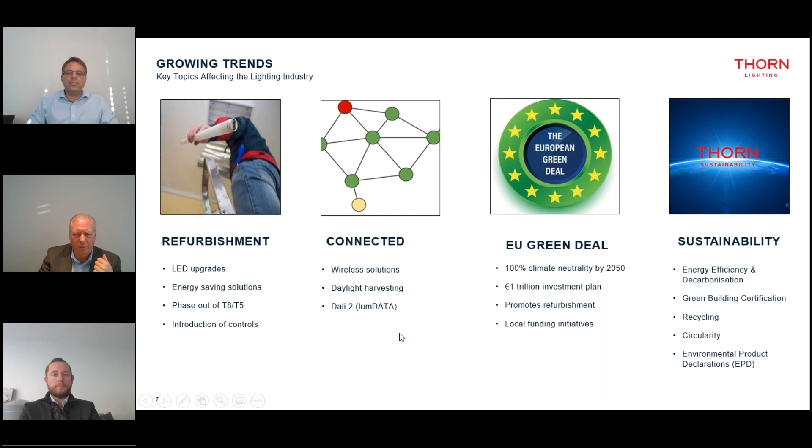And the other area for Thorn really is sustainability: energy efficiency, green building certification, and recycling are all big areas that we're very much focused on. And this is driving the lighting industry at the moment. When we look at the background to it, the European Union have set this net zero carbon by 2050, which is quite a target. Prior to that, they're looking by 2030 to reduce CO2 emissions by 55%.

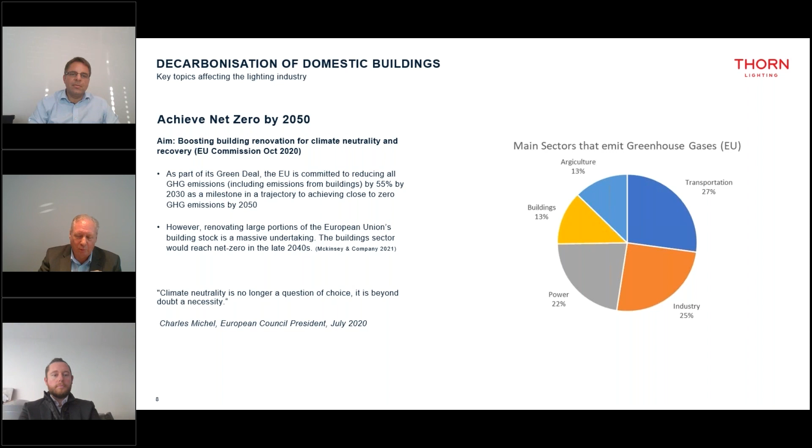And we have a quote from McKinsey saying this is actually quite a big task in Europe, and they think it won't be achieved until the late 2040s. And the European Council President in 2020 says this is a necessity. We can't ignore this anymore. To save the planet, we have to take this seriously. And as a lighting manufacturer, this is something we very much want to get involved in.

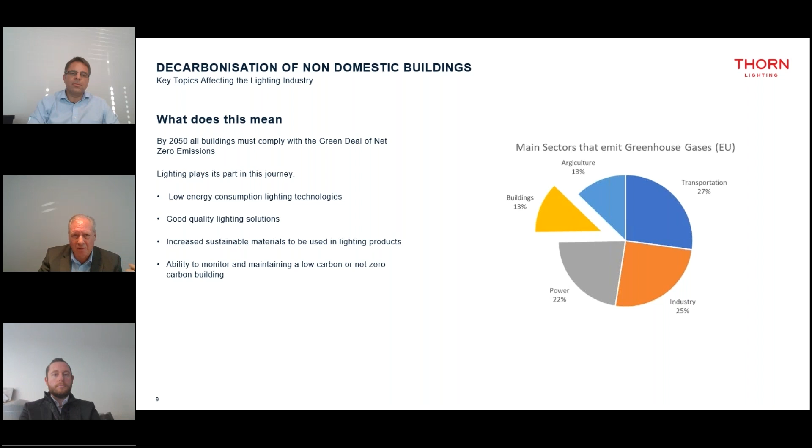13% of the emissions of CO2 come from buildings, and we think lighting will play an important part in this. We now have low energy consumption, good quality lighting, and we've got the tools now to help achieve that target set by the EU. But there's another driver for lighting, and this is one that really affects car parking, especially indoor car parking. And this is the phase out of T8 and T5 fluorescents.

By August next year, within Europe, T8 and T5 will be completely phased out. And I think this will drive demand in other countries too. You can see that fluorescent came in 1934, and there are millions and millions of fluorescent solutions out there. So there's quite a lot to do.

And we know from the data that we collect that even within Europe, 58% of the installed base is still not LED. So not even half the market is LED. So we know that there is still a lot of work to do to get towards this target of reducing our energy consumption.

So where does Thorn come into this? Thorn have been a manufacturer for well over 90 years. We are based in the UK. We do both indoor and outdoor lighting, and we focus very much on car parking because from our offer, we can solve problems for the outdoor part of the car park, the indoor part, but also the building surrounds and the roadways.

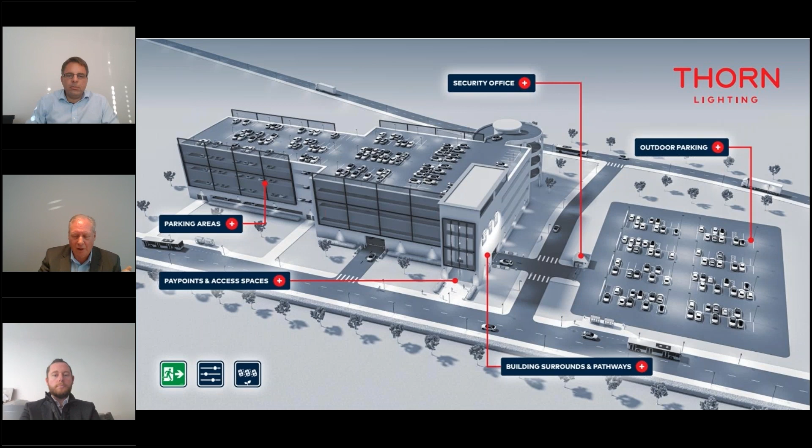So we have a focus on what we do best. And looking at car parks, Thorn are very much a champion of good lighting, and that's really what we want to do. Car parks need to be safe and secure for the people that use the car parking. We want them to feel safe because they can be busy spaces. And with the obstructions of just moving cars and pedestrians, good lighting helps avoid any accidents that happen here. But also we like to follow the regulation, and we normally follow the norms of the EN.

So looking at the areas of car parking where we really focus our lighting solutions, we look at the outdoor area, and we have the solution for the outdoor, and Eliot will speak deeply on this nearer to the end of the presentation, where we want to make people feel safe in those areas and avoid dark spots. And in the indoor segment, we don't want to walk into a dark cave. We want to light them so that people recognize faces, recognize the pathway.

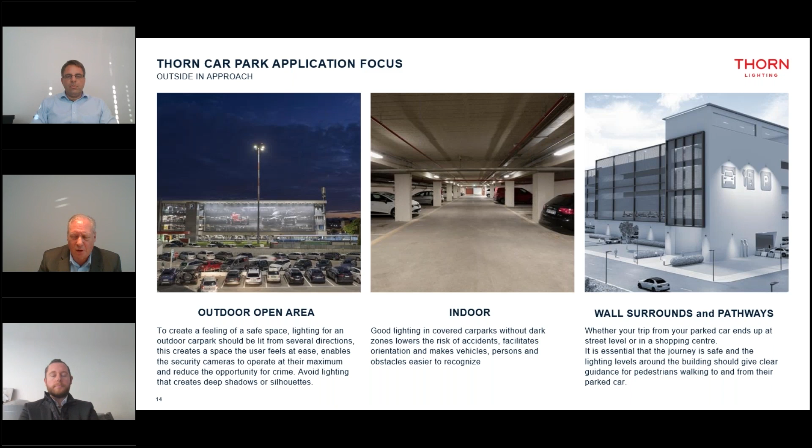But also the surrounding of the building. You walk from the car park to your retail park or to another area. And again, we need to ensure that people feel safe. And the lighting regulation means that we're not polluting light going upwards. So we spend a lot of our energy making sure light points downwards and we don't get reflected upward light. But again, Eliot will talk about this in his part of the presentation.

So looking at indoor lighting, here we're looking at the multi-story car parks, the underground car parks, in retail spaces, in airports, and in transportation areas. And all of them have basically these four elements: the entrance and the exit, where there could be a change from dark to light and light to dark. So lighting this space needs to minimize any glare to the driver. This area is probably exposed to the elements. So again, we need to ensure the lighting always works. And they're probably operating 24/7.

Going into the parking area itself, we need to avoid the possibility of people driving into each other or driving over things. The good lighting, again, is quite important, and we need to make sure it's safe. And we use a choice of optics to get this. And also, we consider lighting controls in this area. And then looking at the other areas, the pay station is an area where people are probably quite agitated. They have a lot of people around them. They're trying to pay for their parking. So this area needs to be well lit, mainly from a security point of view.

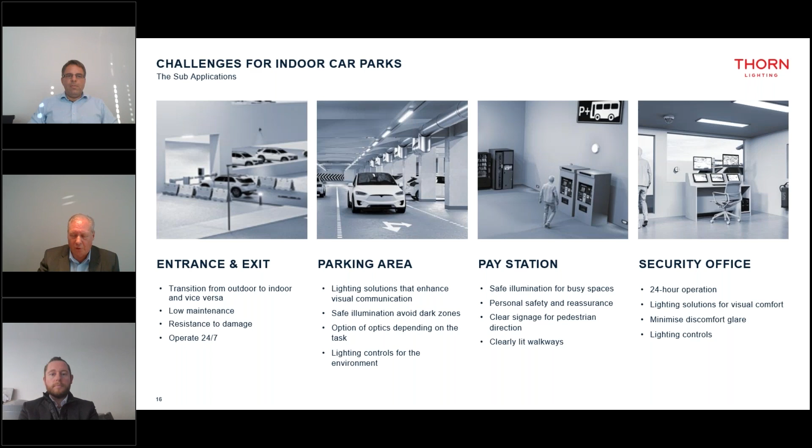And then there's the people that work in the car parking. We need to consider them. They're spending long hours in the office. So we need to ensure the lighting in that area avoids glare off the screens, and it's a comfortable place for them to work in for long periods. And this is something that we try to do with our solutions.

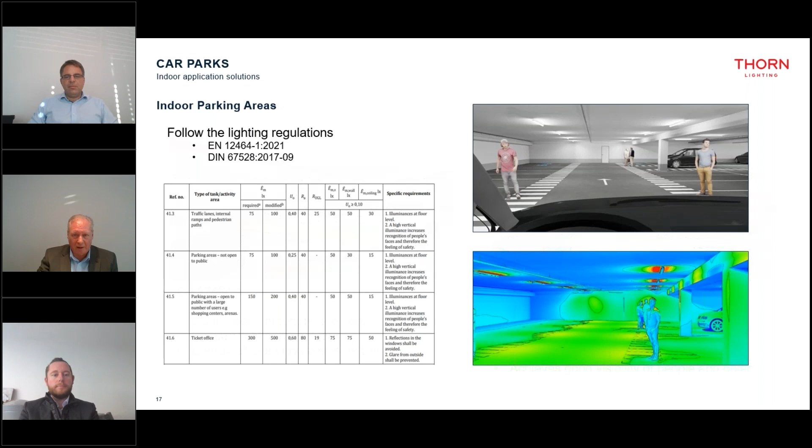So as part of lighting, we always try and follow the regulations. And when we're doing lighting design, we follow two regulations, which is the EN 12464, but also the DIN regulation, which is very much for the German-speaking segment. Both these regulations are acceptable and very good. And I can show you the difference between the two in the parking standards. One of them, the EN standard, measures the floor, that there's good light on the floor that allows you to drive within the space and also walk the space.

And the DIN specification is slightly different. They look at the level of lighting 1.2 above the horizontal, and also they measure 3 levels on the vertical, so 0.8, 1.2, and 1.6. And this achieves good visibility of people. So you can see the face, you can see the features of people as you're driving around, and it makes the whole area a very safe space. And this is something that we can offer as part of our service.

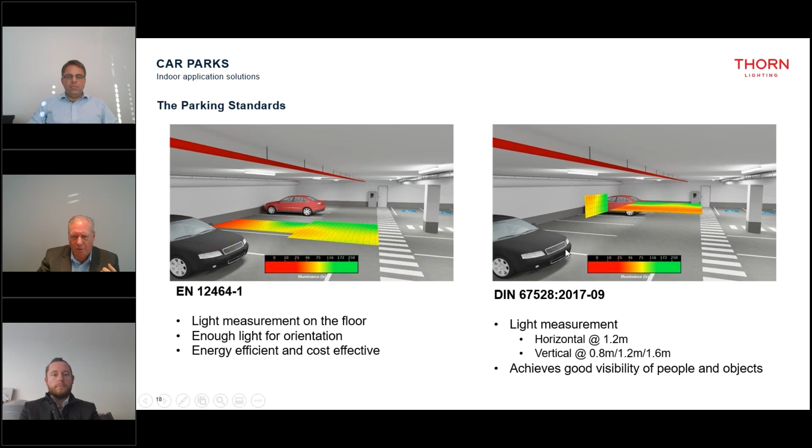So looking at the car park area, what can we do? We offer a number of products. And these products are specified for the car park, because we know that normally in a car park area, the ceilings are quite low. So we need to use a wide beam optic. Traditionally, the AquaForce Pro is what we would use with this wide beam.

It's IP65, it's IK08, so it's tough and resistant, and it allows for the dusty environment that could occur within the car park. But it has this very wide optic, and by having the wide optic, it means we can light all the spaces within the car park itself and avoid this dark cave atmosphere.

But we also have other products. We have Force LED, which is very highly resistant. It's made of aluminium, so if there are areas where we need exposure to the elements, then we can use Force LED. So we have the options of products that we use, and we can pick depending on the application area.

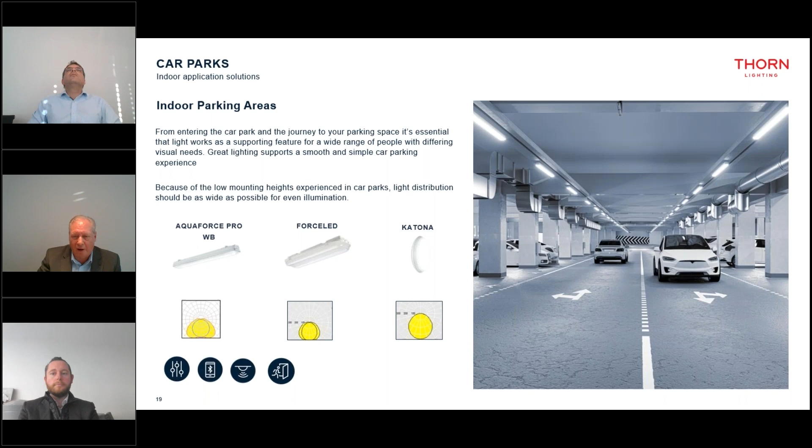And then we have another product called Katona, which is intended for stairwells. It has a 2000 lumen output. It's IP65 and IK10, so very tough. And it fits very well in this environment where you need tough, robust products.

Some of the trends we're seeing indoor are going to be very much new technologies. We see that now there are security cameras very much. There are cameras that will identify your number plate to visualize you coming in and leaving, but also the growing demand for electric chargers, the EV points.

The estimate is by 2030, there'll be something like 17 to 18 million electric cars across the world, and a large proportion of them will be within Europe. So this additional energy consumption is quite important in the construction and development of car parking. From a lighting point of view, this is where we think we come in very well, because our aim is to reduce energy within the car park environment. And we see that in the future, the management of energy within the car park environment will be an important factor.

So what we want to do is help you save energy, and what tools can we give you and offer you to do that, especially in the refurbishment market. The options we always see are LED tubes, gear replacement for the products that are already there, or a one-to-one new replacement of a product. And for all of them, there are things you need to consider.

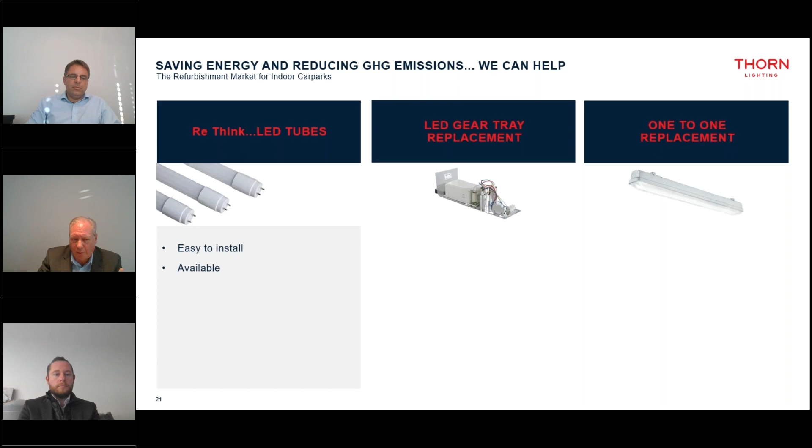LED tubes, they're very easy to install, they're available, but putting them into an existing product really causes some negatives. For example, light distribution. The light distribution of fluorescent is completely different to an LED tube. So do we achieve what we set up in our lighting design, and do we create shadows by putting in the LED tubes? There is no lighting control, so we can't dim the products.

And also, if you put this type of product into an IP65 or 66 fitting, then is there going to be a thermal issue? And does it then cause failure of the product because it overheats? So there are some pros and cons, but from Thorn our feeling is that there are more negatives than positives.

The other thing is just to replace the gear tray that's already installed. That's very easy to install. They're available. We already offer this as a service from Thorn. It fits into the current luminaire, and also it doesn't destroy the architecture of the ceiling that's already there. It may be that you've got a historic building and you can't really take out the old fitting and then put in the new fitting.

But here there are some negatives because, again, the distribution between the fluorescent tube and an LED can be slightly different. And the other issue we have to consider is the fitting itself. For example, an IP65 waterproof fitting may have been in a building for 10 years. At this time, there may be UV issues, and the plastic may start to become brittle. And if you change this for a gear tray, then you might actually break the original fitting.

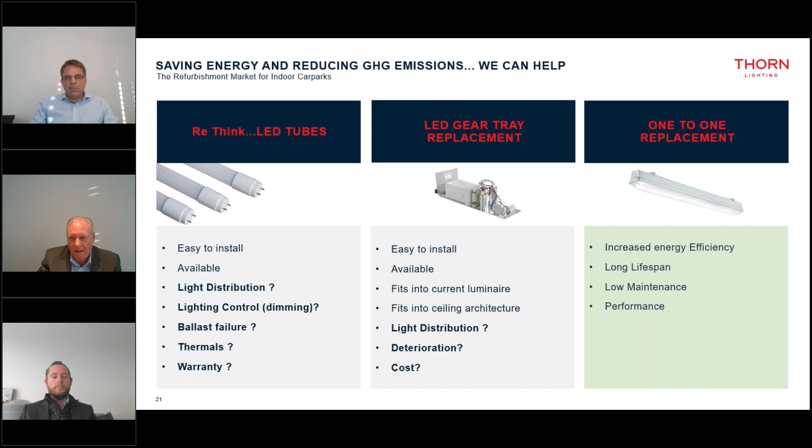And lighting controls: we can now introduce lighting controls, which we'll talk about later. And then it meets the needs of the user of the space. The one-to-one is actually designed to go in that location.

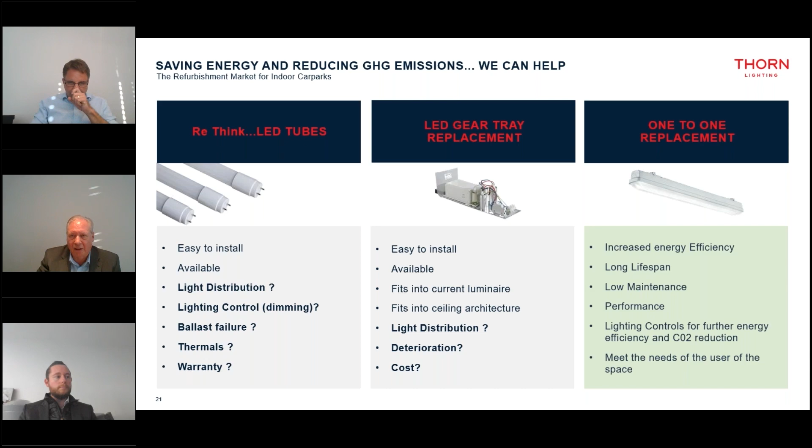So I've got a case study just to try and explain what I mean and how we see this as something we need to do in the future. This is a car park from Holland, and it was an existing car park that we refurbished. It had 125 fluorescent tubes in it, and they needed to be replaced with LED. The car park itself was operating 24/7, and the estimate was a 12-year lifetime before they wanted to do any replacement. And it's just a very simple refurbishment option.

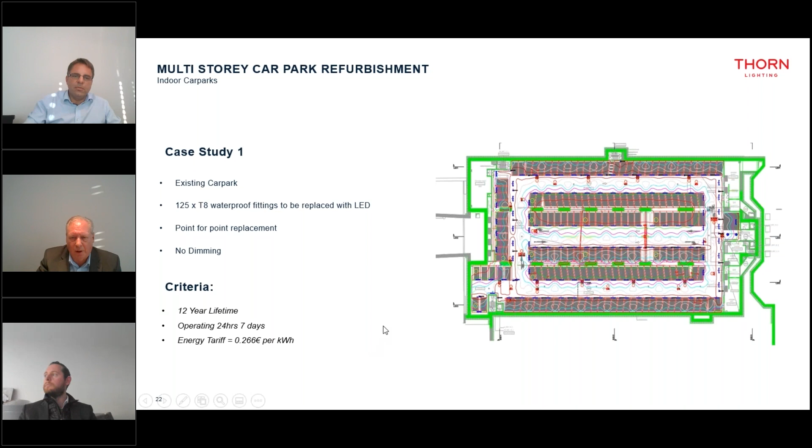And when we put this into the calculation and the solution, the payback period was under 15 months. The amount of energy that we saved was 55%, so a big reduction in energy. And also on CO2, we saved over 38,000 kilograms of CO2 over the 12-year period. And the solution complied with the new parking norms. So it did what we aimed it to do, which is light the area correctly, but also save energy. And this is something that we really are trying to bring across, that with these targets of energy efficiency and sustainability, even just changing to LED gives you a good option.

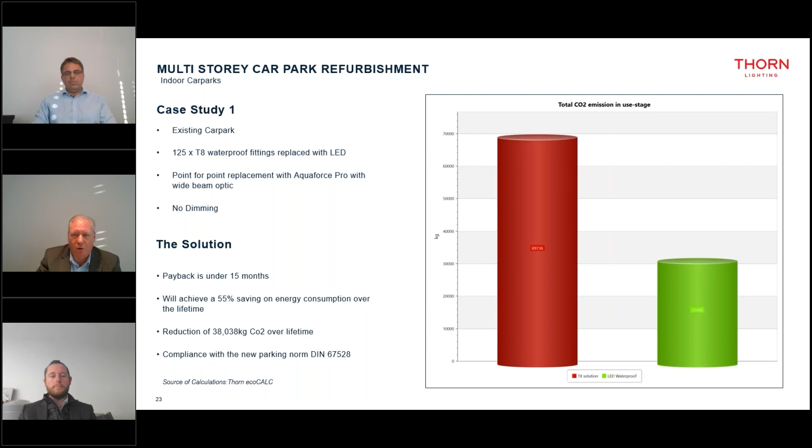But what else can we do? What other options do we have? One thing we can look at is a control solution, a wireless control solution. We can still look at reducing energy consumption and our carbon emissions even more. LED is great, but a lighting control solution could be even better. And if we have a wireless lighting control system, then we can minimize our refurbishment time. So the cost, there's no additional cables.

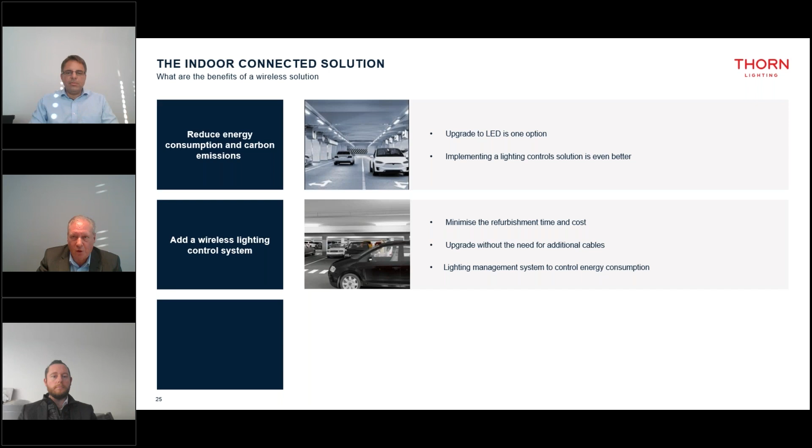And then we have a lighting management system that can control our energy consumption. And we still maintain safety in the car park. We still achieve a good lighting solution, and we also meet the lighting standards that we set out to achieve. Plus, we are going to reduce energy consumption and reduce our carbon footprint. So we're working towards this zero target of 2050. One of the solutions we have is called Basic Dim. And I'm going to ask Jens to explain that, because he's very technical, and then you can understand why this is really a nice solution for car parks.

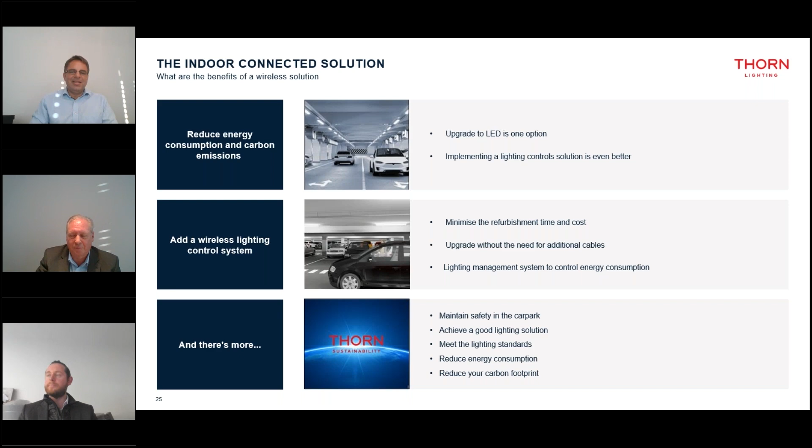Okay. Yeah, thank you very much. Let me introduce Basic Dim Wireless to you. That's a wireless solution, as the name says. The system is called Basic Dim Wireless, and all the luminaires connected with it have a big benefit, because you don't need any DALI wiring anymore. The normal way is to have bus communication; DALI stands for Digital Addressable Lighting Interface. But wireless is a perfect way for refurbishment.

So this system is going to be commissioned with a mobile app, on a handheld or a tablet, for example. There's software on it, and then you can do the commissioning. And the benefit is quite good, because you can reduce the power consumption and, of course, as Alan already explained, the carbon emissions.

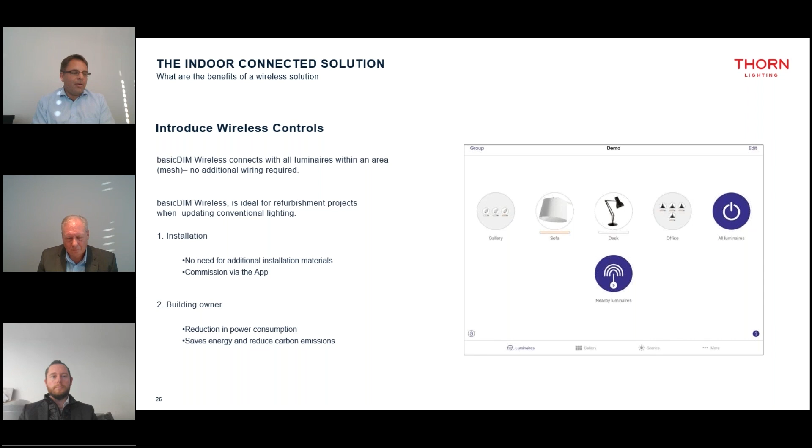Basic Dim Wireless provides a mesh network. So what does mesh mean? Mesh means all nodes are connected to each other, so the information runs through different paths. Every node has a connection to its neighbor, and this has a lot of benefits. It's a very stable network, so there's no single point of failure. That means when one node breaks down or has a fault, the network is still stable and still working. The commands will always find a way to the next luminaires.

And further on, the functionality is distributed over all nodes. That means on every node there's software containing all the functionality, so presence management, daylight management, and all the stuff. If one node fails, the whole mesh network is still up and running, and this is a big benefit against a single point of failure. Okay.

Of course, this system also has a certain limitation. You can have up to 250 nodes in one network. Of course, you can then have more than one network in a facility. This is possible, so it's really scalable in terms of size.

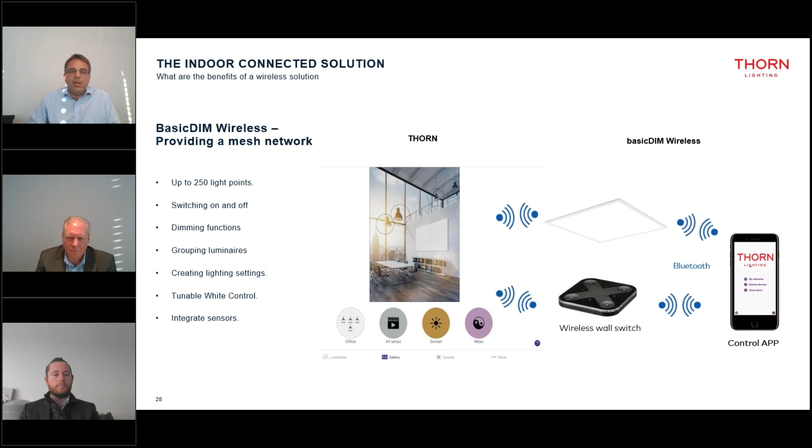As you see here in an example, every luminaire is equipped with such a wireless node, and some of the luminaires also have a sensor integrated. It's a microwave, a radar sensor, and this is a very good kit for a one-to-one replacement. So you can deinstall the old luminaire, install the new wireless luminaire in the same position, and then, for example, you can group them. And the big benefit, again, is that no additional cables have to be installed, so no additional effort and costs for DALI wiring.

With this grouping functionality, you can also define different light levels for different areas. For example, you have risk areas like where the payment machines are. There you want a higher light level, set up when presence is detected, so the light never dims down to zero. But maybe there are other zones where a lower light level is absolutely acceptable. The setup is all done with the commissioning app.

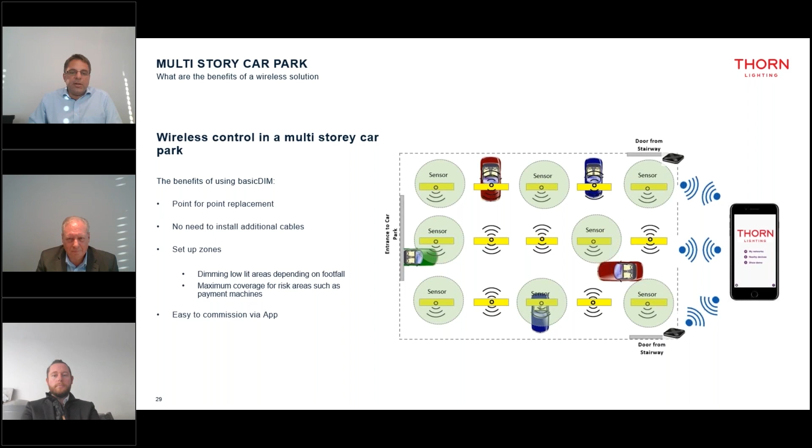So you set up the wireless network in the facility, maybe in one floor of the parking, and then this gateway can control up to 64 luminaires, standard luminaires as well as emergency luminaires, single battery powered emergency luminaires, and brings this information to the central DALI controller. And of course this is scalable for different levels. If you have a multi-story parking facility, then you have maybe 1 or 2 gateways per level, and you can set up a really high professional lighting management system on a wireless way in your parking facility.

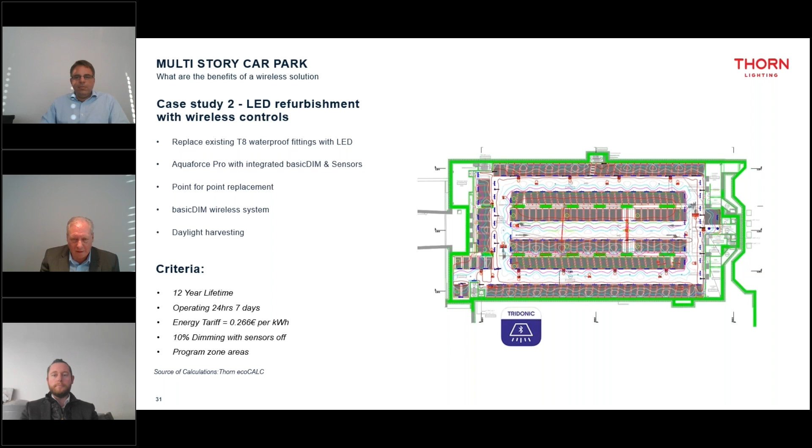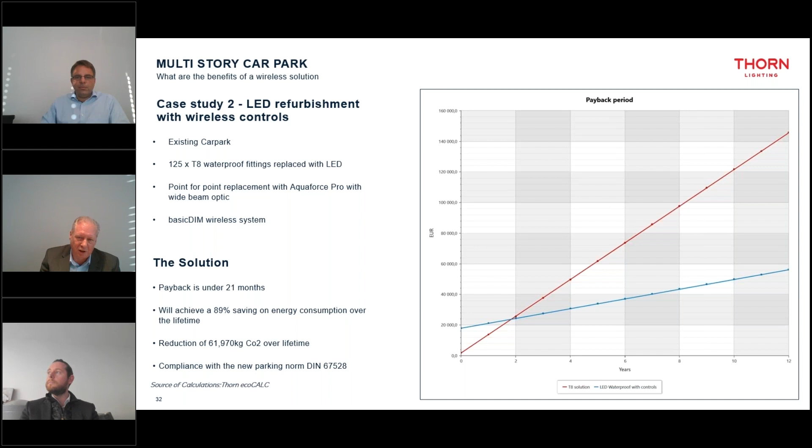So when we put that into calculation, the payback period is longer than the standard - it's 21 months because of the additional cost and additional commissioning. But the big advantage comes in the energy saving. Versus fluorescent T8, nearly 90% of our energy is saved. And looking at carbon reduction, nearly 62,000 kilograms of CO2 is reduced over this 12-year period. So it's really quite important.

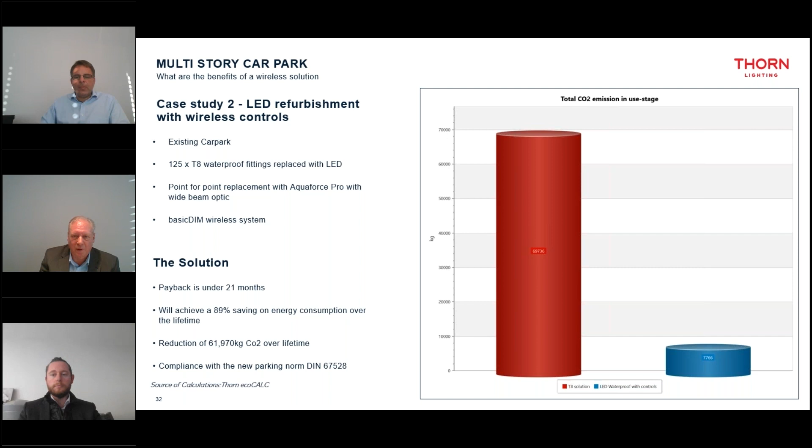What's more interesting is when we start to use controls and we're dimming and controlling the lights, our lifetime starts to go up. The calculation is based on 100,000 hours, but by controlling the light and reducing the amount of energy, we can look at 15 years lifetime for this sort of solution. And we make a comparison between fluorescent, either T8, and the cost over lifetime energy consumption versus LED.

So with LED, just the total cost of the lifetime, we can see a 39% reduction. But in energy costs and CO2, we get 55%. When we step up and we look at dimming or controls, we can see an even bigger reduction. So we can see that the cost of a lifetime is 61%, and our energy reduction is 90%. And that's a significant amount just by controlling the light to be on the right time in the right place.

And from my point of view, implementing an LED luminaire and lighting controls into a car park refurbishment will not only reduce energy bills, but also contribute to significantly reducing greenhouse gases in the future. So for us, it is really quite an important area to bring into car parking, especially multi-story and underground car parking, because we have the technology and the solutions that can help you.

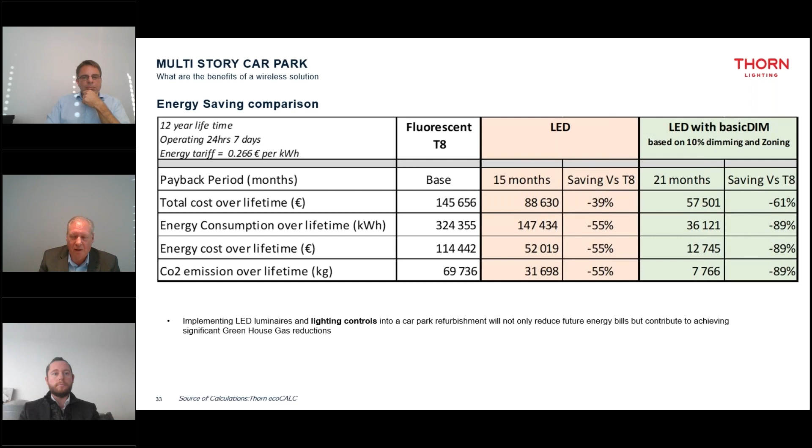So that's the indoor part that we've done. We're now moving to outdoor lighting solutions, and here I'm going to hand over to Eliot, who is our expert in outdoor. Over to you, Eliot. Thanks, Alan.

So I'm conscious that this isn't a webinar about light pollution or dark skies, but it does play a very important part in the topic of outdoor car park lighting applications. Whatever that kind of outdoor car park is, light pollution is a topic that we need to be aware of. So I'm not going to go into loads of details about the overall umbrella topic of light pollution, but just to give a very quick introduction as to why it's a really important topic wherever we are in the world, and how it can affect us negatively, and then we'll go into how we hopefully combat that.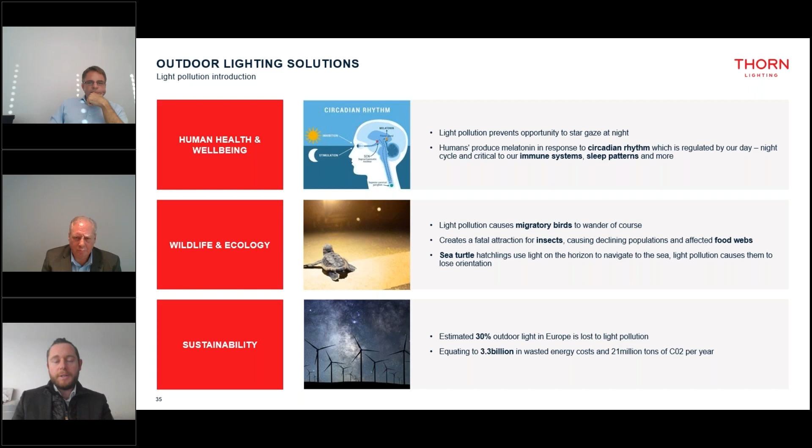So how can Thorn help light the outdoor spaces of a car park, but also limit the effects of light pollution? Well, the easiest thing to do is to go to our IDA approved portfolio of products. So the IDA is the International Dark Sky Association, and they're the global authority on light pollution. And they have a fixture seal of approval program where they analyze photometric data of a luminaire.

We have to meet a warm color temperature because blue light content is more harmful to humans and wildlife. We can emit a very low amount of upward light. We can't angle fixtures so that light is pointing upwards. So certainly that's the simplest form in which to provide light into the outdoor spaces of a car park, but reduce the impact of light pollution.

To take that to the next level, we've developed a new technology which we call NightTune. It's genuinely seen as a market leader now in dark sky sensitive lighting technology. It's a wonderful technology because in a single solution it manages to meet and improve our sustainability targets, reducing the impact on humans and on wildlife and ecology. We've created a white paper on NightTune, available to download, that goes into a lot of specific scientific detail about how this system works.

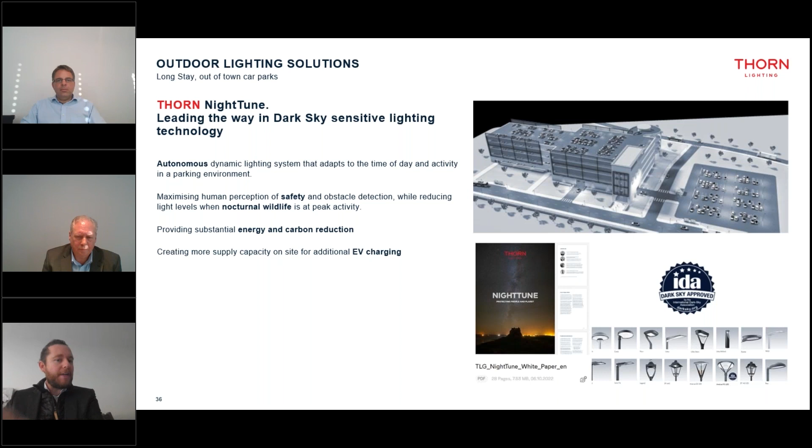But what I'm really talking about here is long stay out of town car parks. So how does NightTune benefit that kind of car park application? Alan, please could you switch over?

NightTune is in effect two different color temperatures of LED within the same luminaire - a 4000 Kelvin neutral white LED and a 2200 Kelvin extra warm white LED. Through the day-night cycle, the light autonomously changes color so that as we get into the less active parts of the evening, where traffic densities and human activity decline, and we see an upturn in wildlife and ecology activity, the system warms to a very warm color with less blue light content, less impactful on humans and wildlife. Alongside that, we also dim the whole solution, reducing our energy consumption.

The reason why we use 4,000 Kelvin instead of, say, 3,000 Kelvin and 2,200 Kelvin is because we get an improved system efficacy - more light out for the energy we put into a luminaire. That said, if we compare NightTune to a fixed 3,000 Kelvin colour that has a dimming system, NightTune still emits less blue light content through the night cycle than a standard static 3,000 Kelvin solution does.

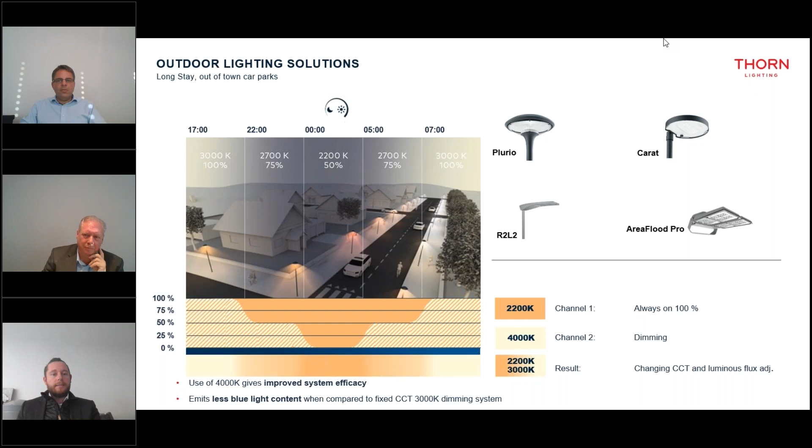So to add an extra tier onto that, we didn't just launch NightTune on its own. We added something in addition, variable light distribution. So with NightTune, we have two different color temperatures of LED within the same luminaire that change autonomously through the night cycle. With variable light distribution, we also add in different optics that create a different beam angle from the same fixture so that we can have two complementary lit effects.

So from one luminaire point, we have an optic that is perfect for a cycleway, a pedestrian walkway, and in addition, whatever the type of roadway is then adjacent to it. That means that when movement is detected in this application, not only do we have the exact right beam angle and lit effect specific to where the activity is, we can also change the color temperature within the same luminaire, which creates a visual cue for either a pedestrian or a motorist as they move throughout that space so they can identify each other clearly.

So variable light distribution and NightTune are two technologies we've innovated which lend themselves so well to various different applications of car parks. Variable light distribution is very relevant for high population density areas where we assist with those visual cues. And NightTune is great for those typically out of town, longer stay car parks.

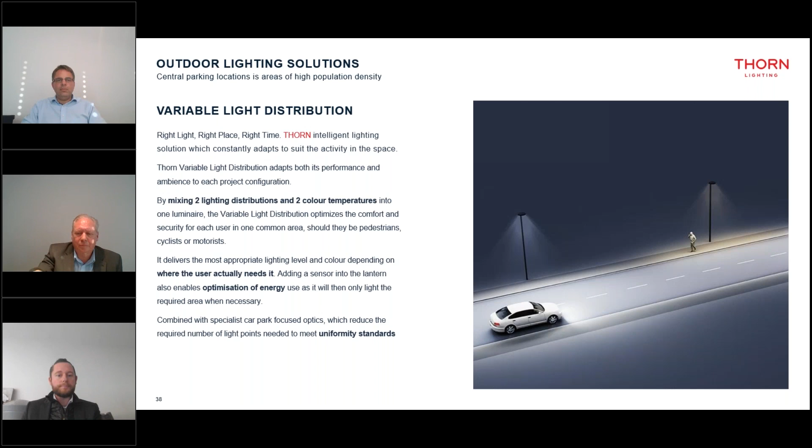Alan, please could you switch over? So then we move into the connected solutions for controls and connectivity.

Alan, please could you change slides? So the first one here is UrbaSens Civic Connect. Civic Connect is quite unique in the market because it uses a cellular-based technology - CAT-M1 and similar, future-proof mobile technology, similar to what we have in our mobile phones. That means each luminaire has an identifiable GPS, and that can be identified from a CMS platform anywhere in the world. So you can log in and control your lighting system wherever you might be, from the comfort of your laptop or mobile phone.

What that CMS platform provides with the Civic Connect solution is a full package suite of sustainability analysis. It tells you how much carbon you're using, it tells you your energy saving, and it gives you a heat map of your car park showing exactly where the activity is and isn't, and how people, pedestrians, traffic and cyclists move throughout that space. This is a really great tool to support maintenance schedules, planning and security systems, and it really gives you the ultimate information package at your fingertips for your car park.

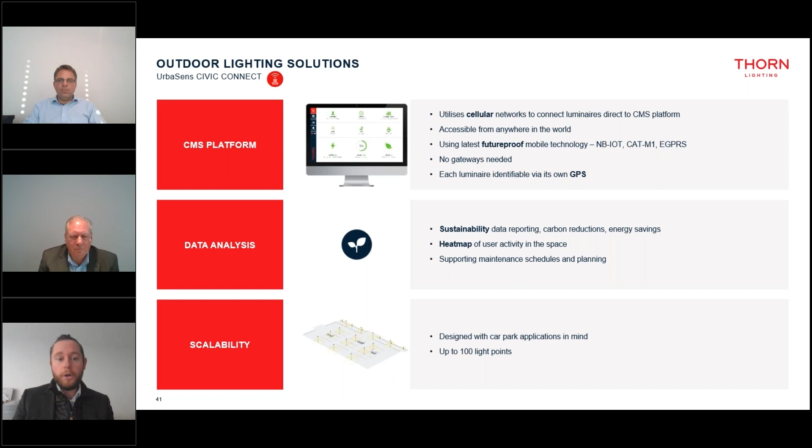And this is designed with car park applications in mind, typically up to around 100 light points per installation. Alan, please could you go on to the next slide?

So the second one that we're going to focus on from the controls and connectivity portfolio is UrbaSens Sentinel. It's the go-to solution to enable NightTune and variable light distribution. It's a very different technology type to the one we just saw that was cellular based. This is an 868 megahertz mesh system, which is a very stable solution and technology to work with.

And the benefit of this particular control system is that there's no SIM cards, no web connection needed, no service fees, so it's very much an install-and-forget solution that we have on offer. And yes, we also have one GPS node per installation, and unlike a lot of competitor products, that means there's never any stray of your date and time.

So when you're creating these weekly schedules based on how you use the space, based on your opening hours, based on a local transport network, it means the control system never loses track of date and time. We can adapt light schedules to anything in principle - traffic patterns, rhythms, transportation schedules. And this also has the added layer, should you wish, of NightTune and/or variable light distribution, for applications within car parks of around about 60 luminaire points.

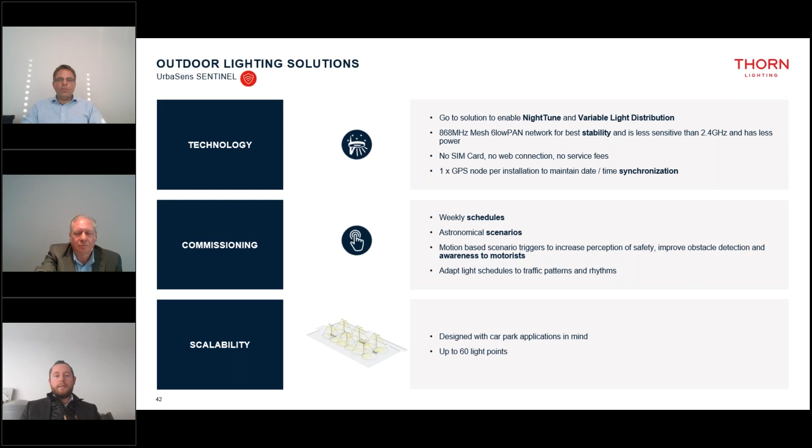Thanks very much. Over to you, Alan. Okay, thanks very much, Eliot.

So we're coming towards the end of our presentation, and before we come to the end, we just wanted to show you a case study. This is a retail park in Belgium, and when it was launched, it was Belgium's most sustainable park, and one of Europe's first CO2 neutral retail parks, and Thorn supplied the outdoor and indoor lighting solution.